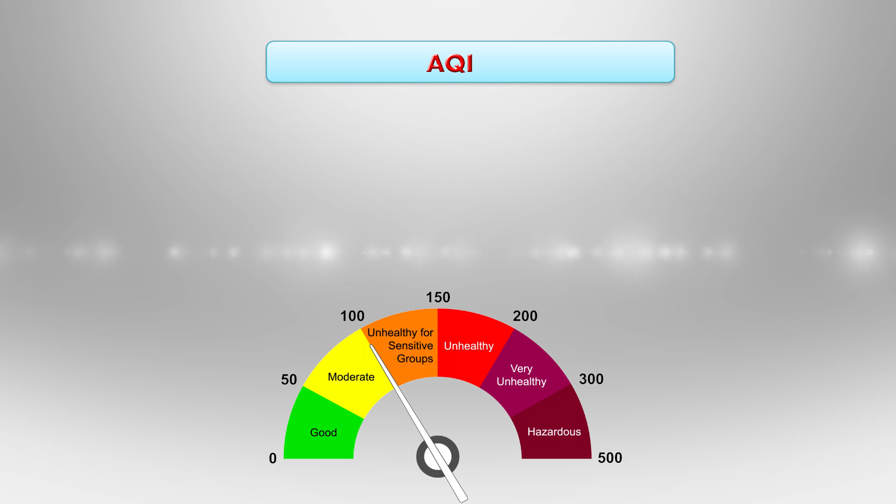Before understanding the treatment technologies of air pollution, we have to understand what air quality is. Are there any parameters to understand air quality? One such parameter is the air quality index. The Environmental Protection Agency maintains a system of rating the safety of the air in a given area, which is called the air quality index. Understanding the air quality index is crucial because it gives every one of us vital information about the conditions of the air in our location and how the air quality in our city can impact our health on a daily basis.

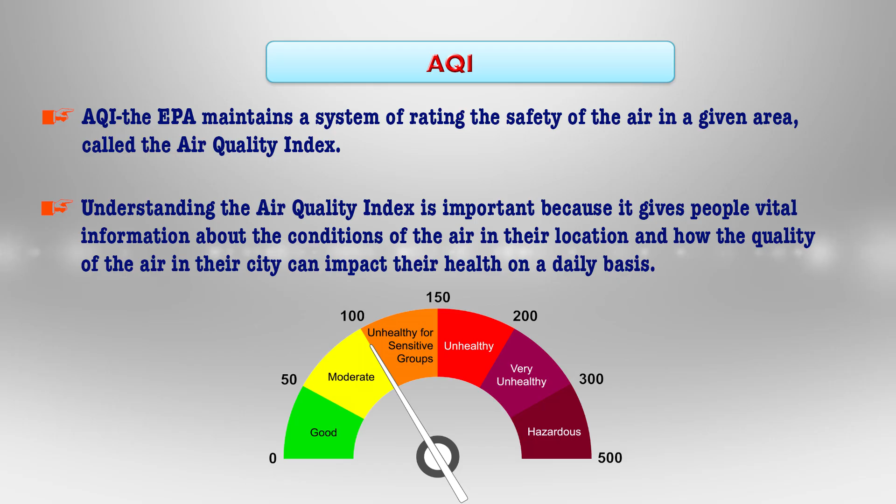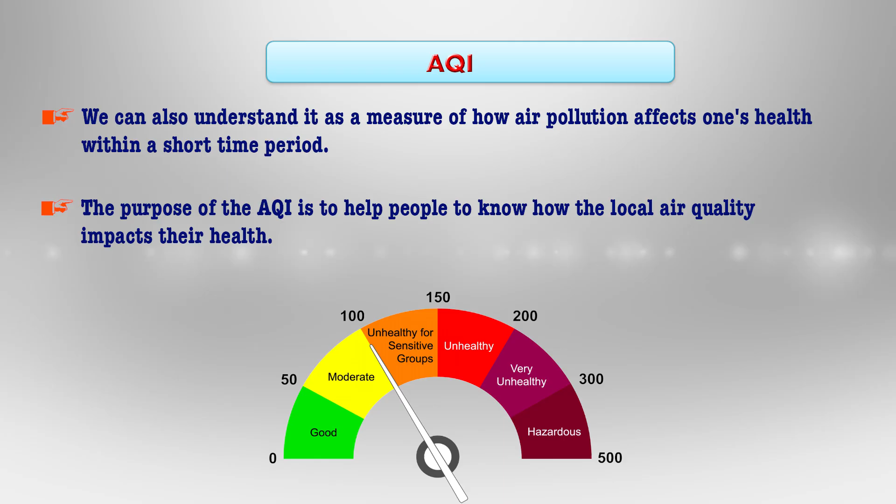It is a measure of how air pollution affects one's health within a short span of time. The purpose of the air quality index is mainly to help people know how the local air quality impacts health. AQI is needed to provide a metric for warning citizens, because they have to know the dangers of air pollution at various levels of intensity. Air pollution is one of the primary causes of health ailments and premature deaths across the globe. The World Health Organization estimates that ambient outdoor air pollution kills around 3 million people every year. Just see the sad state of affairs.

The most common air pollutants we see outdoors are the criteria air pollutants, as EPA has categorized them, which we have already discussed in previous sessions. These criteria air pollutants are ground level ozone, particulate matter 2.5, particulate matter 10, lead, carbon monoxide, nitrogen dioxide and sulfur dioxide. First we have seen ozone pollution, because that is also one of the criteria pollutants.

Ozone comes from the emission of volatile organic compounds that interact with sunlight and heat to form ground level ozone, which is an important chemical in photochemical smog. Ozone pollution can irritate the eyes, nose and throat, and it will remain for a longer duration in people's lungs.

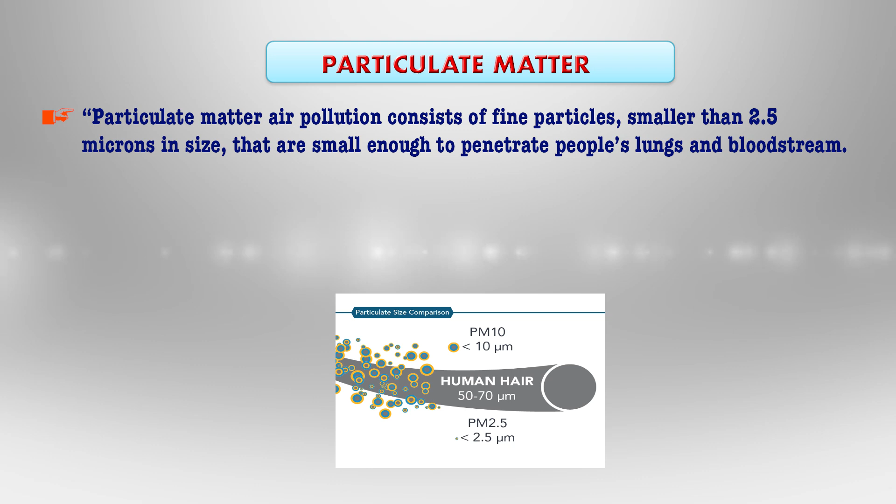Next to ozone, particulate matter air pollution mainly consists of fine particles smaller than 2.5 microns in size, which are small enough to penetrate into the lungs as well as the bloodstream. That also we have discussed. This particulate matter pollution can cause heart and lung disorders and increase a person's chance of developing lung cancer.

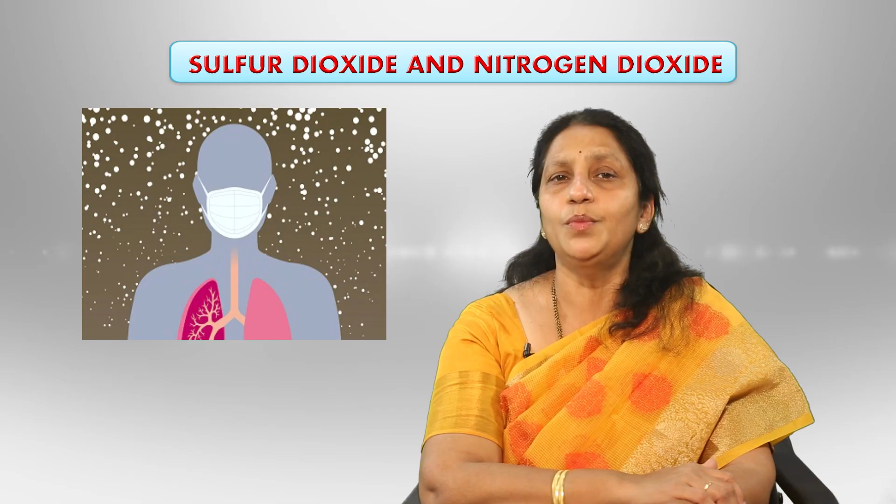So, both sulfur dioxide as well as nitrogen dioxide, which are emitted from industrial areas as well as automobiles, can definitely cause respiratory ailments like asthma. It is thought to be a contributor to asthma and is also related to emergency room visits. High levels of exposure can definitely reduce lung function permanently.

Next to particulate matter, the next one is carbon monoxide, which is released into the air primarily by the incomplete combustion of fossil fuels. It is colorless and odorless, so we are unable to identify and recognize the carbon monoxide pollutant. When inhaled in large amounts, it can easily lead first to confusion, then dizziness, and finally death.

The levels of atmospheric lead have decreased by around 98% since 1980, but lead as a pollutant can still be found in the atmosphere. Exposure to this lead contaminant can cause a variety of problems. Especially, it can impact kidney function, the entire nervous system and the immune system, and also cause developmental problems in children.

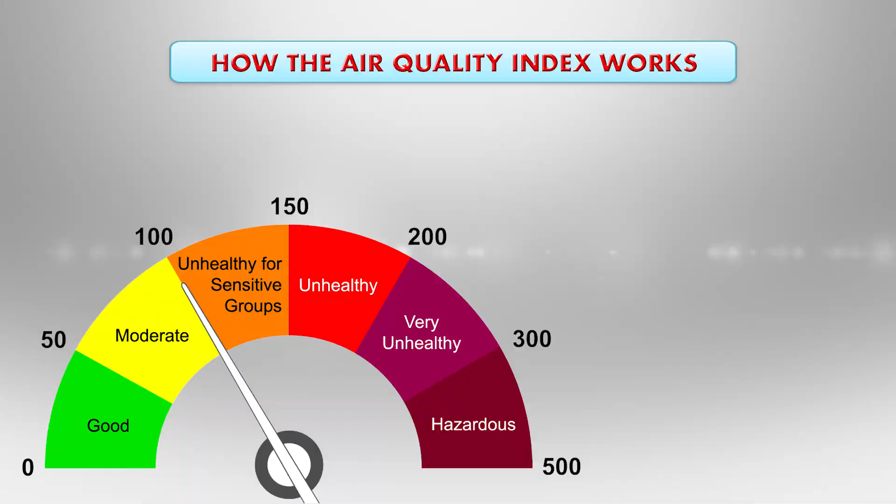So, due to these dangers of ambient air pollution, a system for warning citizens about abnormally high and dangerous levels of ambient air pollution is highly required. The air quality index is one such parameter to make us understand the levels of air pollution in the general environment. So here we have to understand how the air quality index works.

Depending upon the level of atmospheric air pollutants present in a specific area, the ranking goes from good air quality to hazardous air quality. Each ranking has a corresponding number value as well as a color code, so that we can easily identify and understand how polluted the surrounding air is.

The first ranking in the air quality index represents good air quality. It is represented by the color green and covers the values 0 to 50. That means if the AQI value is between 0 and 50, we can understand that the air quality is good. Air in the good category normally poses very little or no risk to the health of the general population.

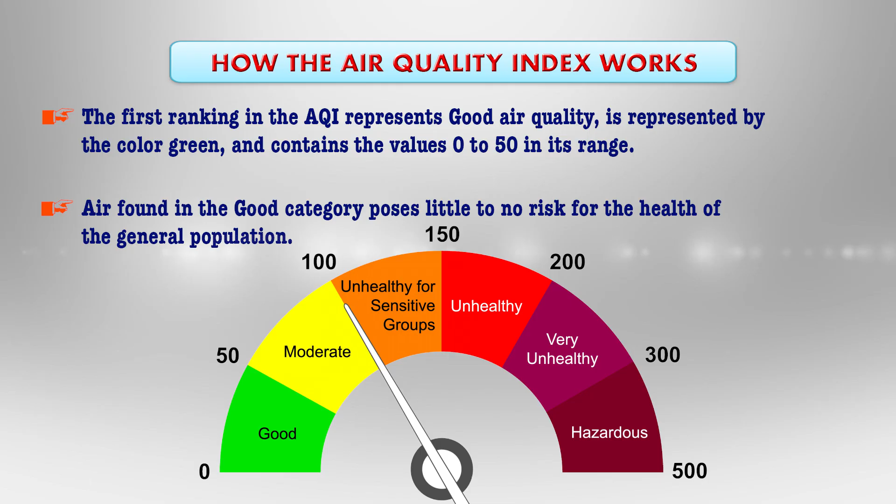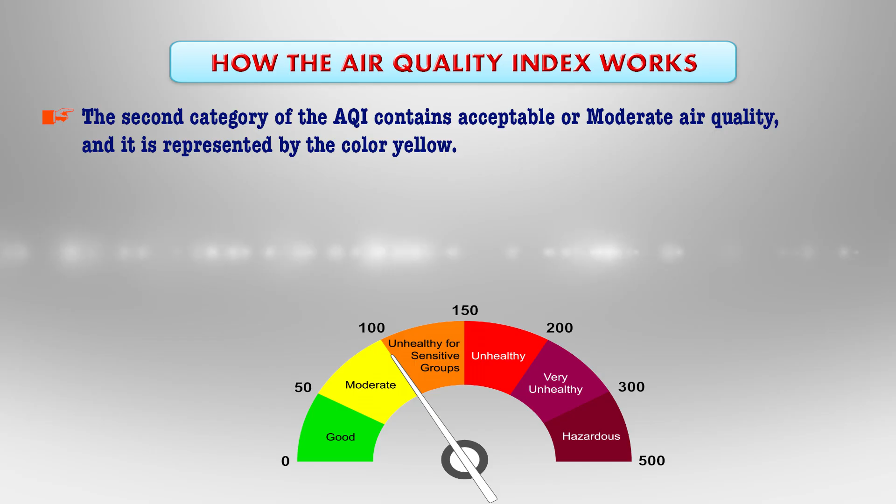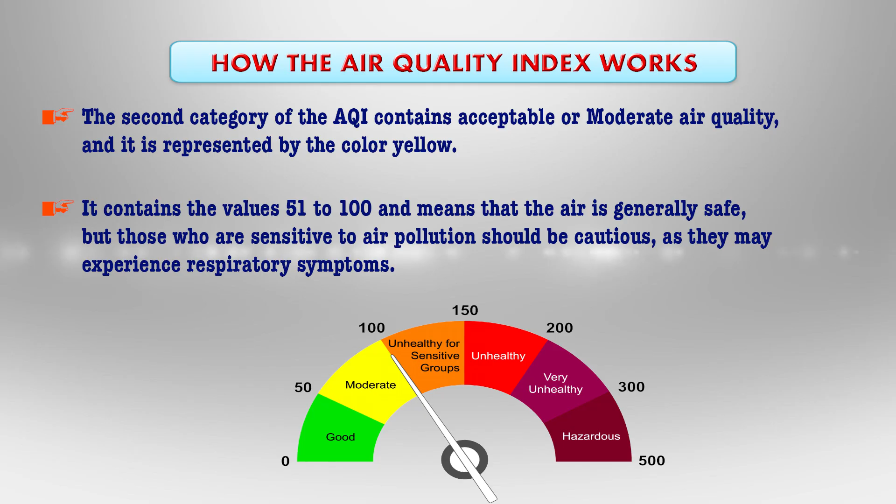The second category of the AQI is acceptable, or moderate, air quality, which is represented by the color yellow and contains the values from 51 to 100. That means the air is generally safe. We cannot say good, but it is safe. But those who are sensitive to air pollution have to take some precautions, as they may sometimes experience respiratory symptoms.

The third category of the AQI represents air that is unhealthy for sensitive groups. It is symbolized by the color orange, and the values are between 101 and 150. That means the general public is not likely to be negatively impacted by the air, but sensitive groups like older people and children are at risk from exposure to particles present in the air.

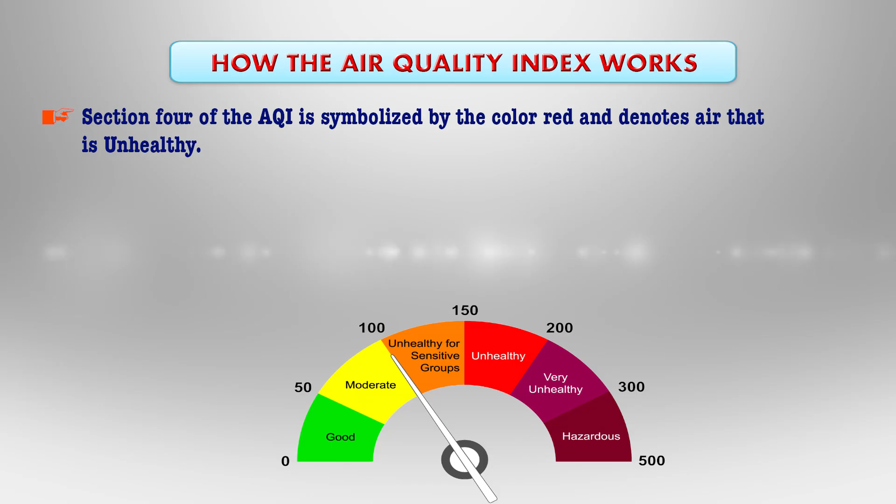The fourth stage of the air quality index is symbolized by the color red, meaning air that is unhealthy. It contains the values 151 to 200. At this level the air can start having adverse health impacts on the entire population, and people who are sensitive, and also children, can experience much more serious adverse health effects.

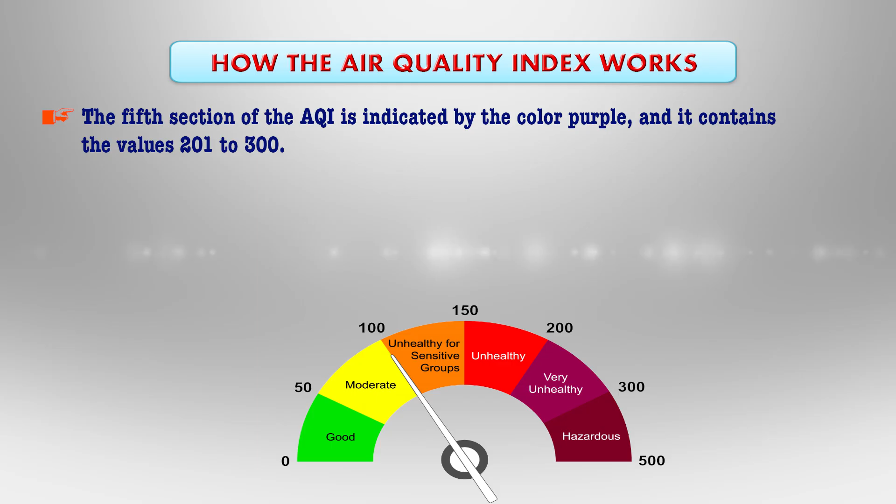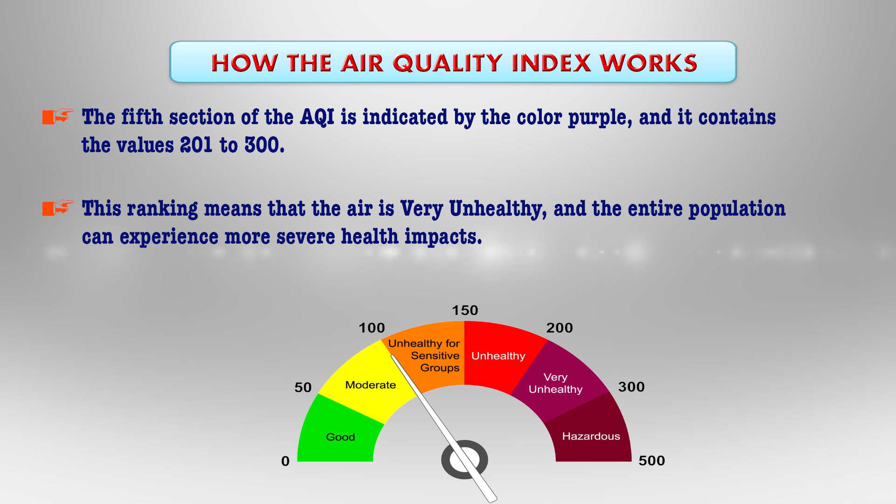The next category, number 5, is indicated by the color purple and contains the values 201 to 300. This ranking means that the air is very unhealthy and the entire population can experience more severe health impacts.

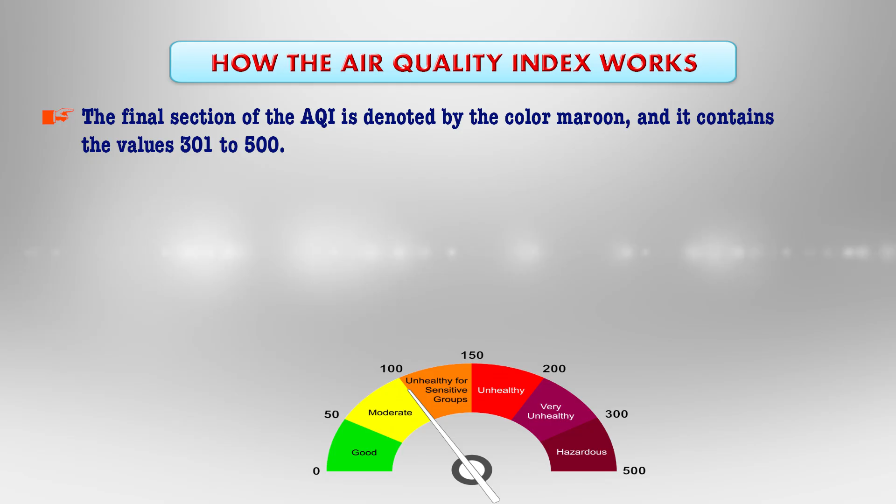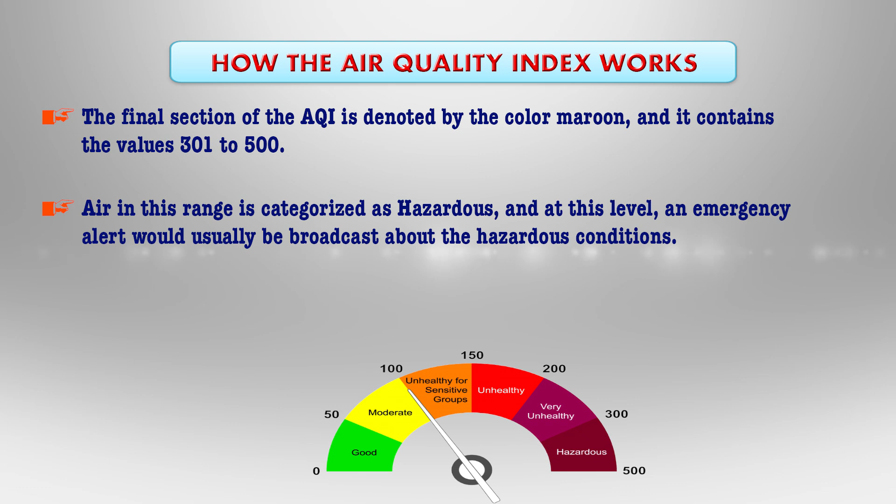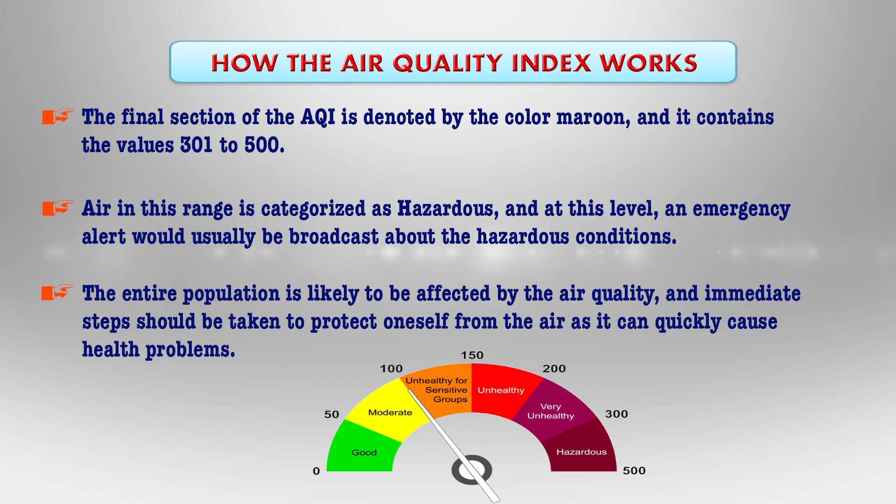The final category of the AQI is represented by the color maroon, and it contains the values 301 to 500, which is what we are experiencing nowadays. Air in this range is categorized as hazardous, and at this level an emergency alert would usually be broadcast about the hazardous conditions. The entire population is likely to be affected, and immediate steps should be taken to protect oneself from the air, as it can quickly cause health problems.

So at the very unhealthy and hazardous levels, we have to limit the time spent outdoors if possible, only going out when it is absolutely necessary. So stay away from the freeways as well as the major centers of traffic, and then go out when pollution levels are very, very low.

So we can also use industrial grade face masks to limit the amount of pollution we are breathing. We will also want to invest in quality air filters and air purifiers for our home, and also understanding the air quality index, which is critical for our health.

So who is most at risk from this air pollution? We have seen that people with lung diseases like asthma and chronic bronchitis, and also children, including teenagers. Active people of all ages who exercise or work intensively outdoors will definitely be affected. Some healthy people are also more sensitive to ozone type of pollution. So understanding the air quality index is important because it keeps us informed about how to protect our health.

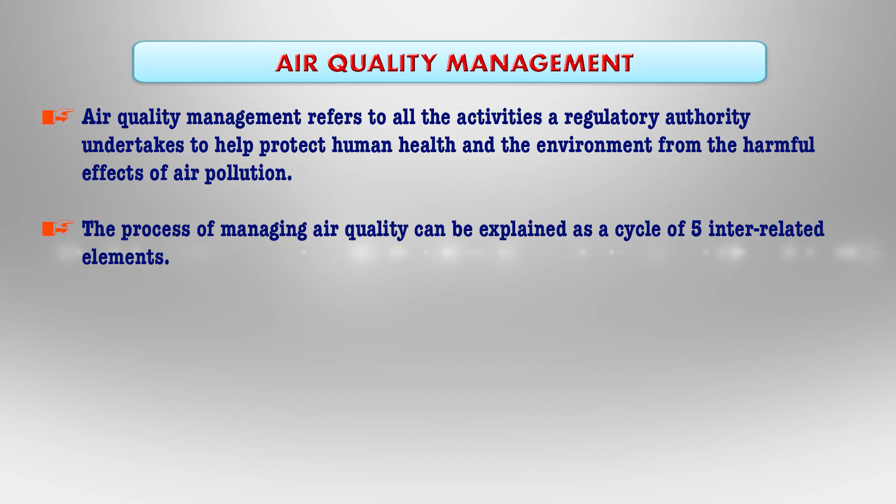So now we will look into air quality management. Air quality management means all the activities the regulatory authority undertakes to help protect human health and also the environment from the harmful effects of air pollution. The process of managing air quality can be understood as a cycle of 5 interrelated stages, or elements, as we can call them.

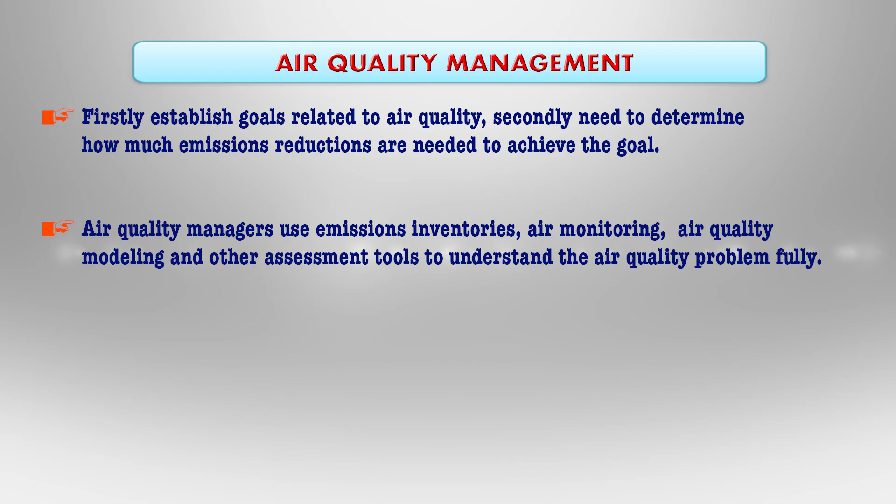Firstly, establish goals related to air quality, and secondly, determine how much emission reduction is needed to achieve the goal. Air quality managers normally use emission inventories, air monitoring, air quality modeling, and other assessment tools to understand the air quality problem fully.

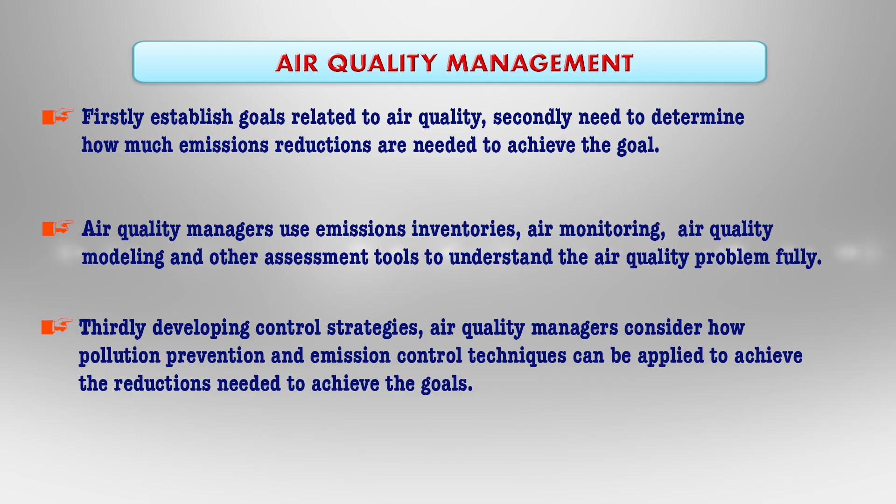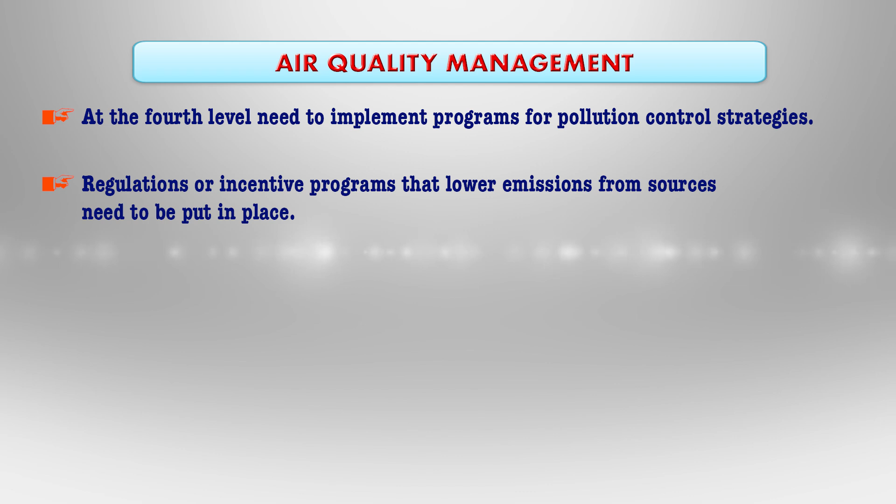Thirdly, developing control strategies: air quality managers consider how pollution prevention and emission control techniques can be applied to achieve the reductions needed to meet the goals. At the fourth level, we need to implement programs for pollution control strategies. Regulations or incentive programs which lower emissions from the sources need to be put in place. Regulated industries need to be trained and assisted in how to comply with these rules, and all these rules need to be enforced properly.

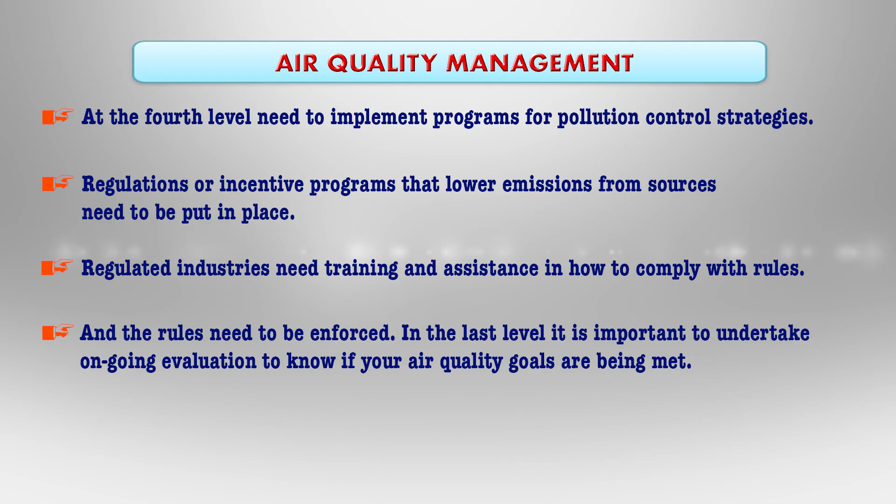In the last level, it is important to undertake ongoing evaluation to know if your air quality goals are being met or not. This cycle is a very dynamic process, with continuous review and assessment of goals as well as strategies based on their effectiveness.

All parts of this process are informed by scientific research, which provides air quality managers with essential understanding of how pollutants are emitted, and once emitted into the atmosphere, with so many factors such as wind speed as well as pressure, how they are transported and transformed in the air, and their effects on human health and also the environment. So with all these, now we will discuss some of the important controlling methods which you have studied in your topics.

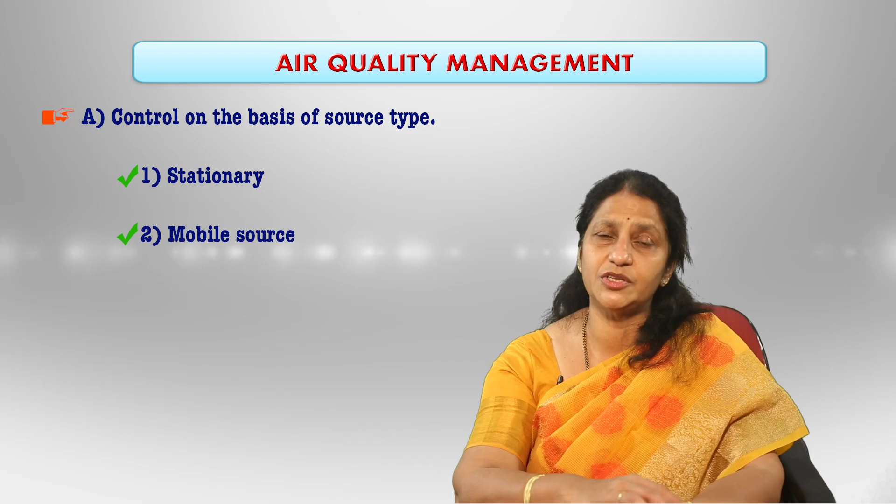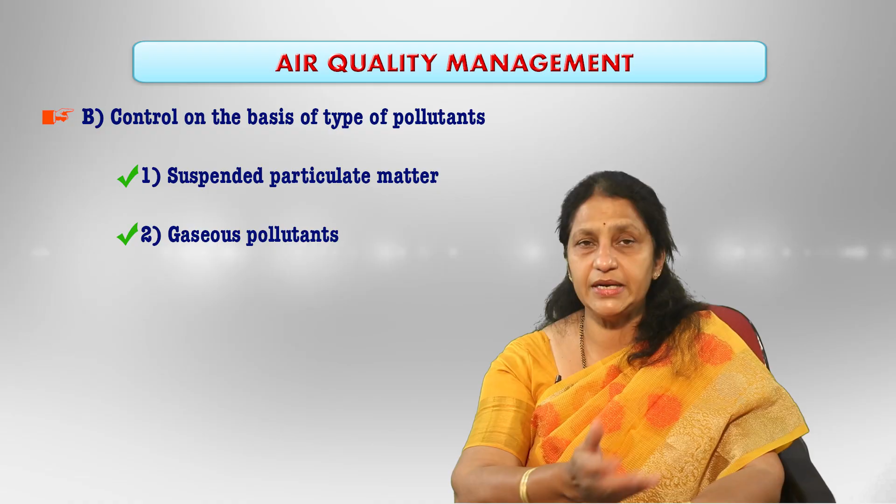The controlling methods for air pollutants are basically classified into two categories: control on the basis of the source type, that is stationary or mobile, and control on the basis of the type of pollutant, whether it is suspended particulate matter or gaseous pollutants. Mobile sources are moving sources like aeroplanes, trains and automobiles, whereas stationary sources are fixed sources, that is industrial sources, such as a power plant, a factory and other facilities like that.

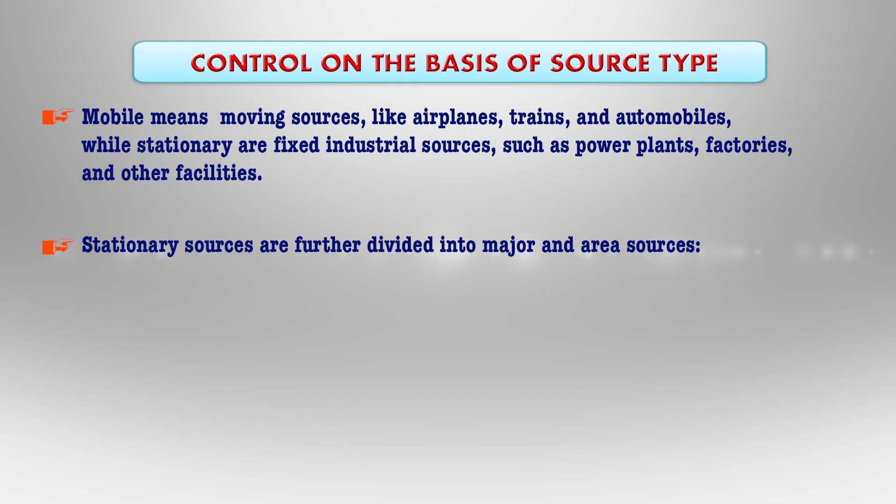Stationary sources are again divided into major and area sources. Major sources emit either 10 or more tons of a single air pollutant or 25 or more tons of a combination of air pollutants, so they are divided on the basis of the pollutant load. The second is area sources, which emit less than 10 tons of a single pollutant or less than 25 tons of a combination of pollutants.

So in high enough concentrations, the pollutants which are produced either by the mobile or from the stationary sources could cause adverse effects to the atmosphere as well as the surrounding environment, and especially human life, by increasing the average global temperature, decreasing the atmospheric visibility, which obviously we are experiencing, diminishing the air quality and affecting human health.

If you look into the industrial setup, there the air pollution control equipment as well as the systems are used to regulate the emissions and to eliminate potentially hazardous substances, for example particulate matter, volatile organic compounds and gaseous substances produced by the manufacturing as well as the processing systems. These control equipment prevent the release of chemicals, vapors and dust by filtering and purifying the air within the working environment.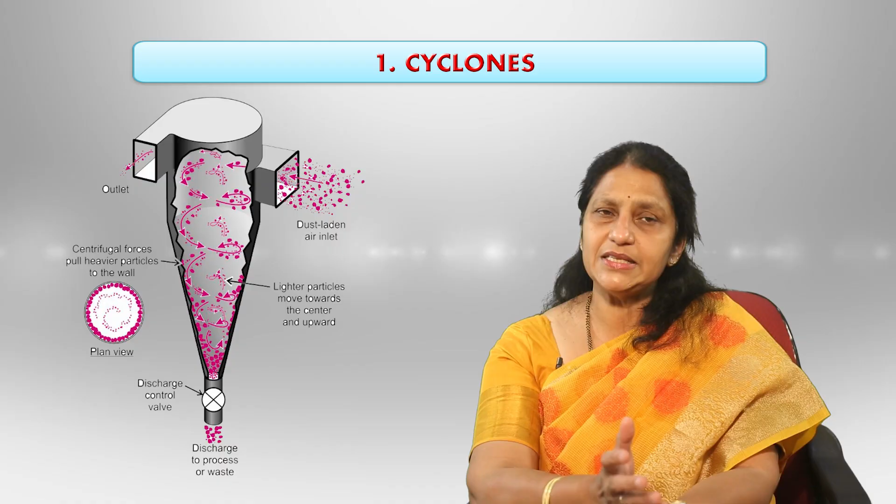In that cylindrical chamber there is a swirling motion that forces large particulate matter against the chamber wall, which slows their inertia, that is speed, causing them to drop into the collection hopper below, so that further processing and disposal become easy. Once it is done, the cleaned gas streams are released out of the cyclone system.

These cyclones are typically employed for filtration of particulate matter above or equal to 50 millimicrons in diameter. Some models are capable of greater than 90% efficiency for particulate matter greater than or equal to 10 to 20 microns. That means the efficiency depends on the size of the particulate matter.

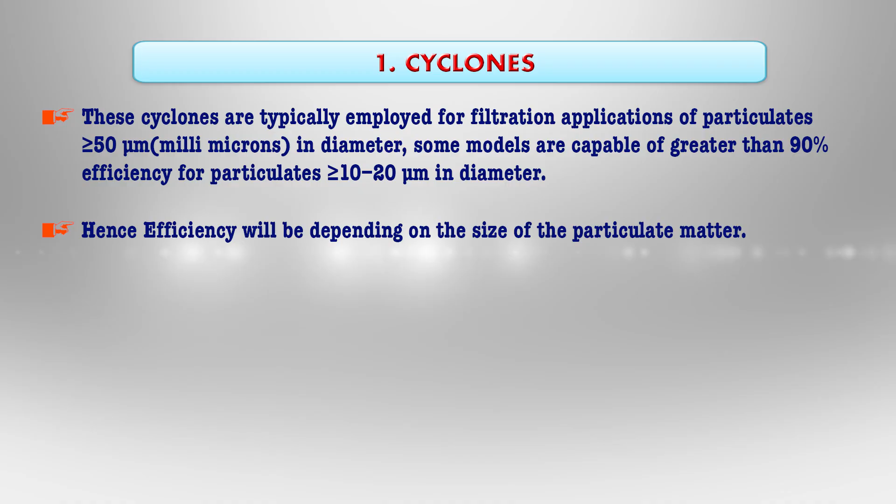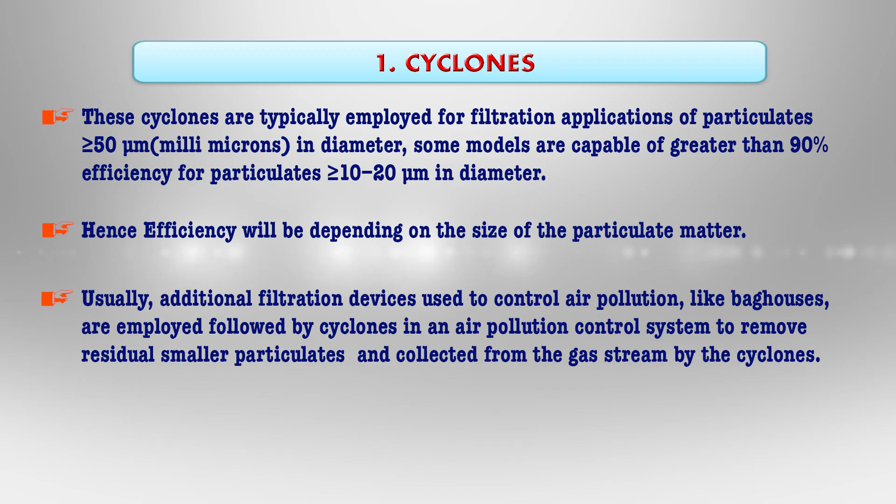Usually additional filtration devices are used to control air pollution, like baghouses, which follow the cyclones in an air pollution control system to remove the residual smaller particles not collected from the gas stream by the cyclones.

Another technology is wet scrubbers. These are also known as wet absorption scrubbers or wet collectors. They use liquid solutions, typically water, to collect and remove water-soluble gases as well as particulate pollutants from industrial emissions.

This wet scrubbing process either passes a gas stream through a liquid solution, or injects a liquid solution into a gas stream. As the gas stream comes into contact with the liquid, the solution absorbs the pollutant, removing it from the stream.

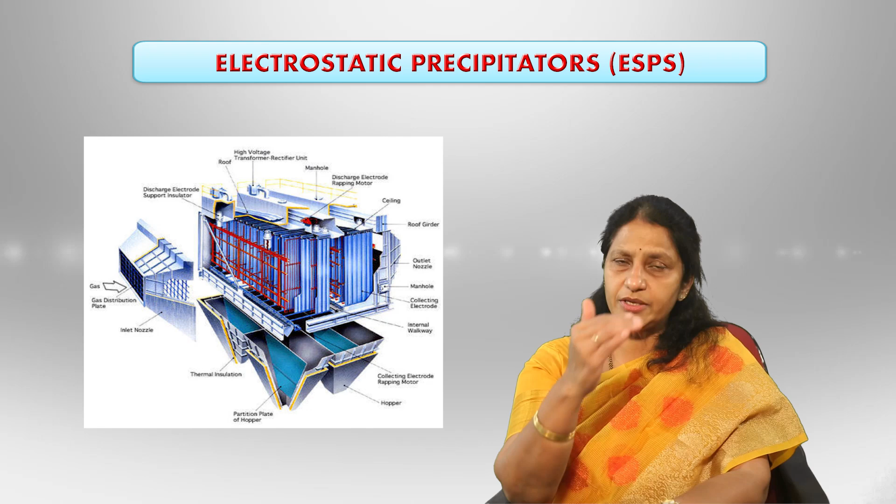So next to this wet collection chamber, another important technology is also used, that is the electrostatic precipitators, ESPs. Just like air filters as well as the cyclones, these electrostatic precipitators are also one of the important air pollution controlling devices. They are used to collect and remove the particulate matter like dust from the industrial emissions and also the exhaust.

So these ESPs especially use transformers to create a high static electrical potential difference between the charging electrodes and the collecting plates. So once the gas stream passes between these two components, an electric charge is introduced to the particulate matter that attracts the particulate matter to the collecting plates.

Similarly to the air filters, particulate matter accumulation is periodically removed from the collecting plates and deposited in a collection hopper which is present below that instrument, either through mechanically dislodging the particulate matter or by introducing water to clean off the particulate matter. So this method is known as the ESPs. They have multiple collection plates and their efficiencies normally exceed 99%.

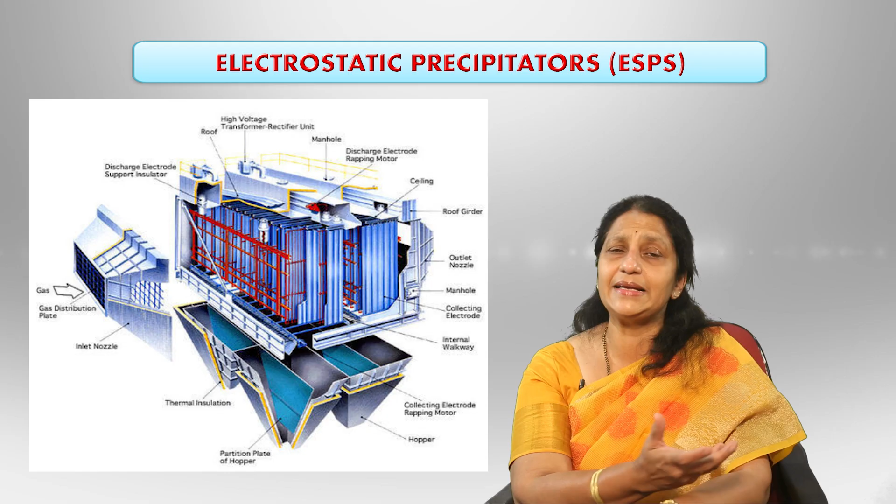So as air passes through a bag house, the particulate matter collects and accumulates on the filter's surface. So the gradual accumulation increases the efficiency of the filter, allowing smaller particles to collect and also causing a buildup of pressure across the filter fabric. So some bag houses are also capable of attaining almost 99.9% efficiency even for small particulate matter.

So these types of filters are suitable for filtering out air pollutants in a variety of industrial processes like power plants, metal processing centers and foundries, and also multi-stage cleaning systems as well. So the particulate accumulation and the resulting pressure differential prompt the need for periodic cleaning.

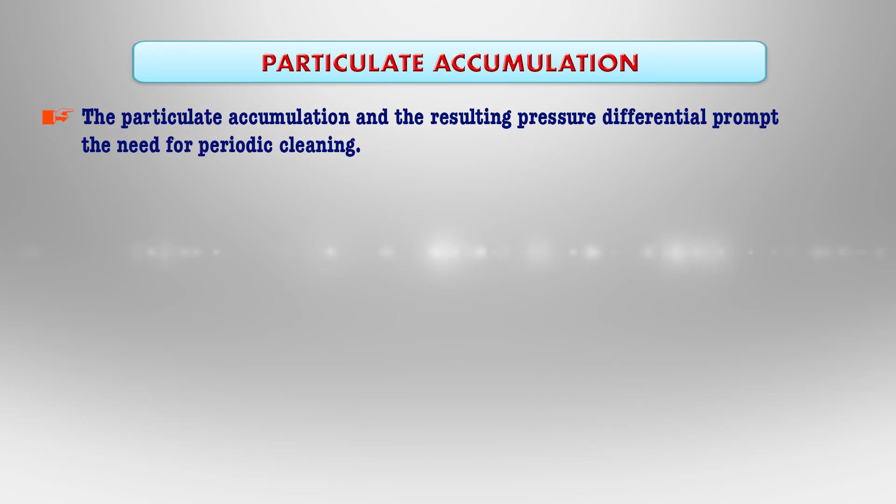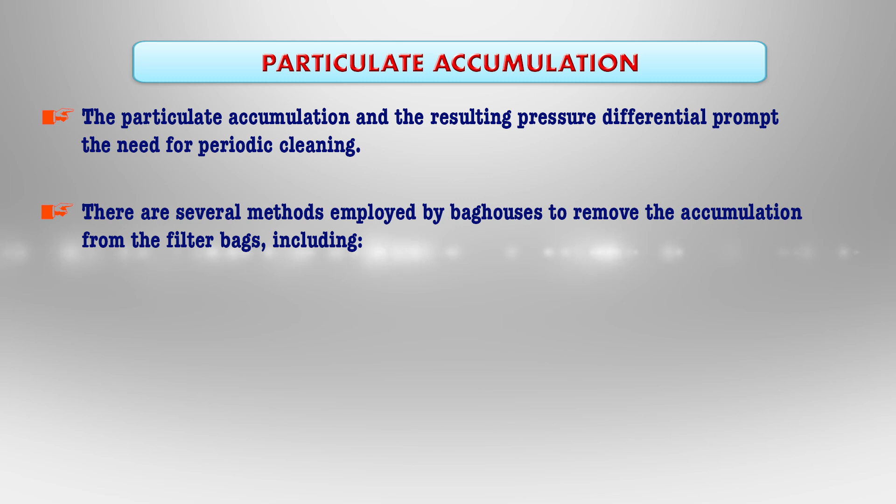So several methods are employed by the bag houses for removing the accumulated particles from the filter bags, like shaking the filter bags and also introducing an air flow into the filter bags in the opposite direction, so that the filtration process will be more efficient. And also pulsing compressed air into the filter bags in the opposite direction to the filtration process.

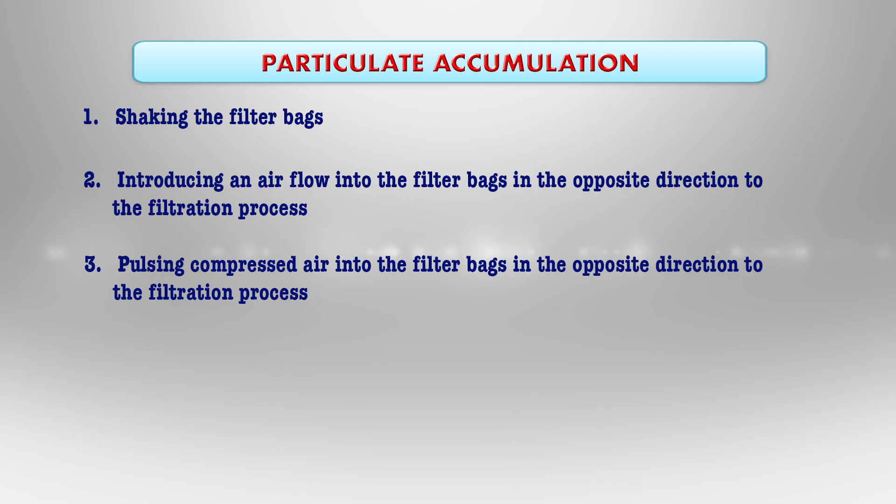And many pollutants, both natural as well as synthetic, are gaseous in nature and require specific technology to effectively remove the pollutant from the exhaust or the process gas stream. So some gaseous industrial pollutants like acid gases, that is hydrochloric acid, sulfuric acid and hydrogen sulfide, inorganic gases like sulfur oxides, nitrogen oxides, ammonia, and also organic gases, ethanol, and many volatile organic compounds are hazardous air pollutants.

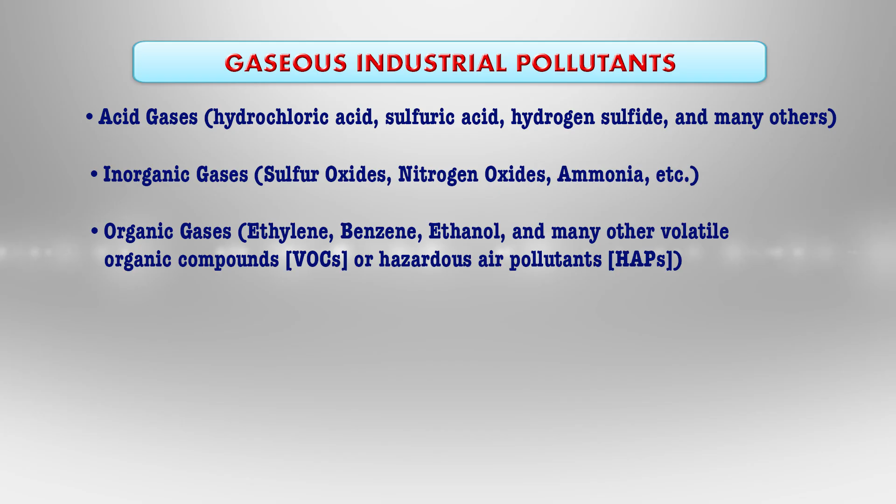So one of the procedures for these gaseous pollutants is absorption. We know that absorption is a physical or sometimes a chemical process of removing a pollutant from a gas phase media by dissolving the pollutant into a solvent media. Commonly the solvent media is a liquid phase, but it can be a dry bulk solid in certain systems.

So the material that absorbs is normally called a solvent, and the gas that is to be absorbed is known as the solute. The most common form of absorption is wet scrubbing. Wet scrubber is a generic name we normally give to a control device that uses the process of absorption to separate the pollutant from a gas stream.

And the next process is adsorption. Adsorption is the mass transfer process in which a porous solid comes in contact with a liquid or gaseous stream to selectively remove pollutants or contaminants by depositing, that is adsorbing, them on that solid. The contaminants being removed are normally called the adsorbate, and the solid doing this process is known as the adsorbent.

So the adsorption process can be both a physical as well as a chemical process. In physical adsorption, we will see that the adsorbate molecule, that is the contaminant, adheres to the adsorbent material by a physical bonding force which is known as the van der Waals forces.

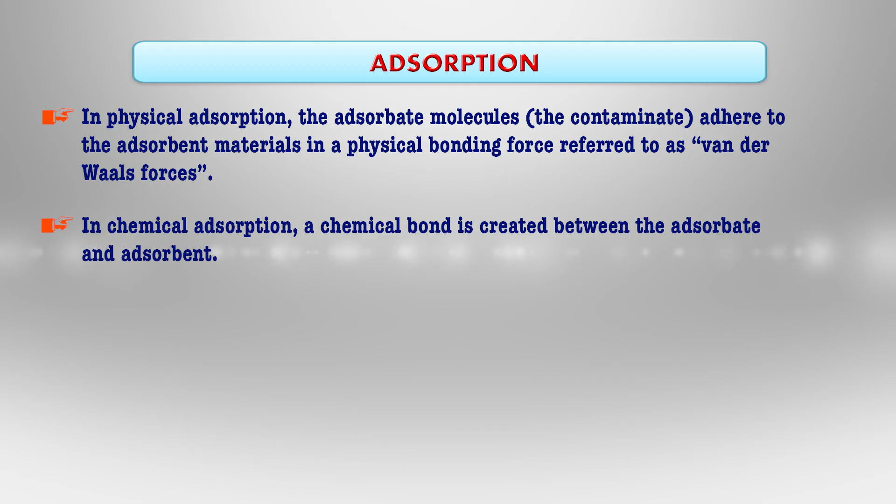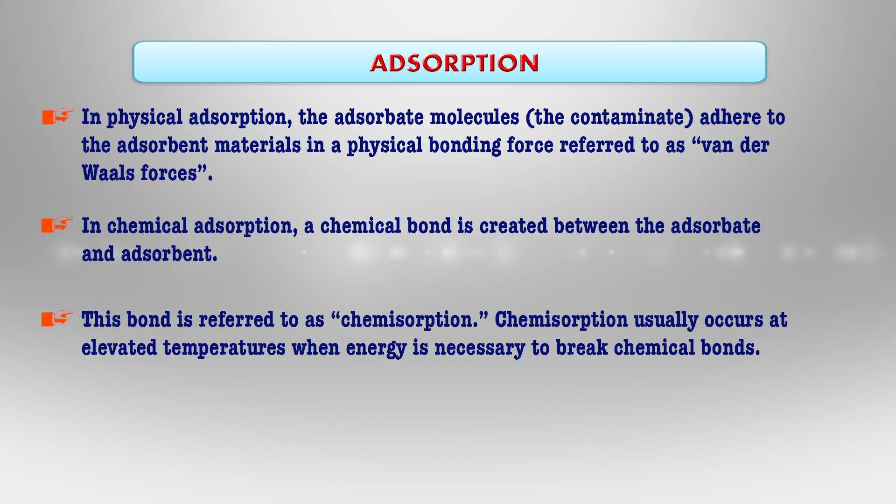If you look at chemical adsorption, a chemical bond is created between the adsorbate and the adsorbent. This is known as chemisorption. Chemisorption normally occurs at elevated temperatures, when energy is required to break chemical bonds. And chemisorption is, of course, essentially the same process which is observed in catalytic oxidation.

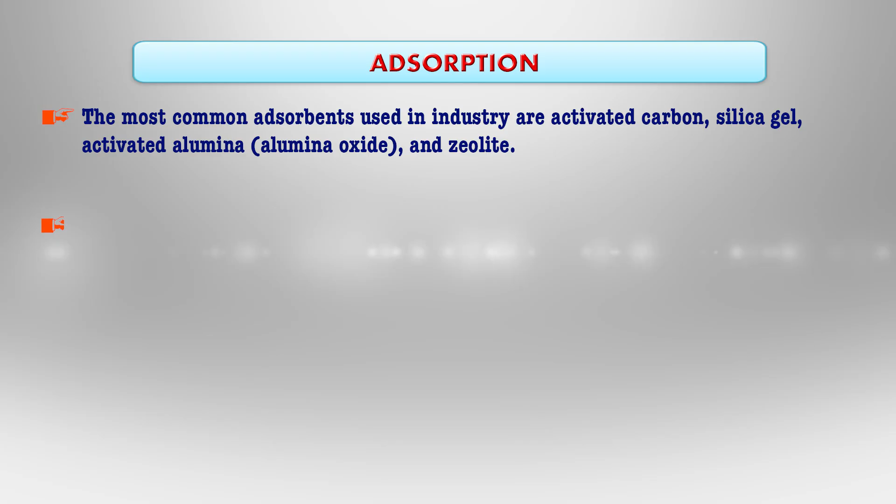The most common adsorbents used in industry are activated carbon, because of its high surface area, silica gel, activated alumina, that is aluminium oxide, and also zeolite. Most important is adsorbent selection: we select on the basis of pore size and distribution, particle size, chemical nature, surface area and surface polarity. Polarity especially is the most important characteristic for selection, because it determines the type of adsorbate for which any particular adsorbent will have the best performance.

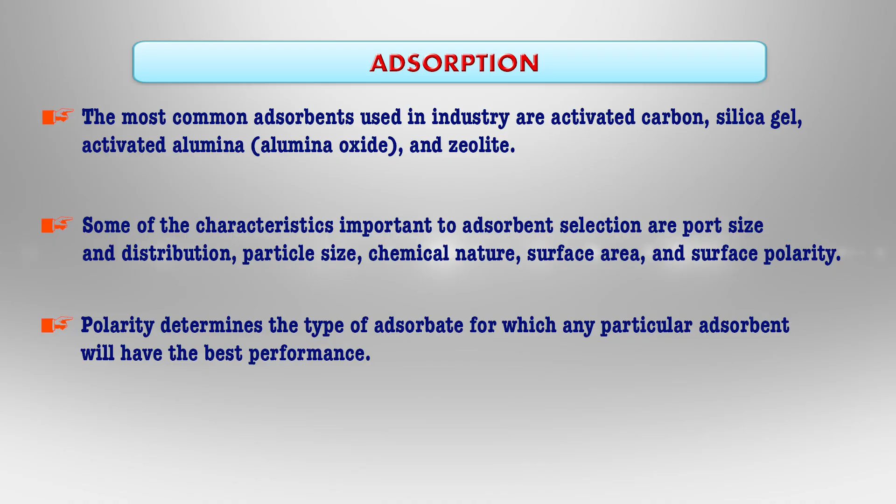Activated carbon is the most common non-polar adsorbent, and polar adsorbents have a great attraction for moisture. Most industrial exhaust streams contain moisture, so the use of polar adsorbents is significantly limited for air pollution control systems.

The next one is condensation. It is a process used heavily throughout industry to convert a gas or vapor into liquid form. Any gas can be reduced to a liquid by sufficiently lowering the temperature or increasing the pressure, and then this condensation process is employed. Some examples are the distillation of various hydrocarbons in refining operations and the drying of air.

Condensation can be used to remove a pollutant from a gaseous stream if the dew point of the pollutant is higher than that of the carrier gas. If this is true, the total gas stream can be reduced in temperature to below the pollutant's dew point, which will then separate the pollutant from the remaining gas stream as a liquid. These are the things we have to understand to decide whether to use the condensation technique or not.

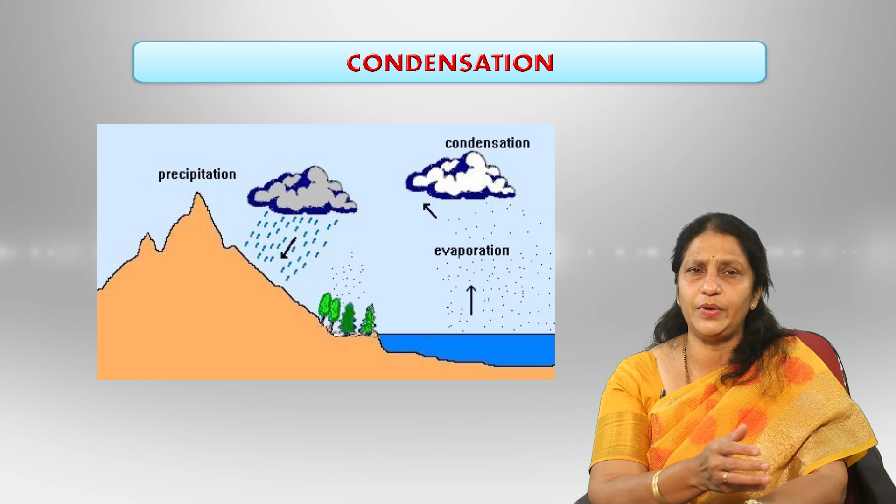Condensation occurs because the pollutant molecules are slowed and crowded so close together that the attractive forces between the molecules cause them to condense into a liquid. This phenomenon is known as van der Waals forces.

Next, the incineration process. The incineration of volatile organic compounds and hydrocarbon fumes is usually done in a special type of incinerator known as an afterburner. To achieve complete combustion, the afterburner must provide the proper amount of turbulence and burning time, and also maintain sufficiently high temperatures. Sufficient turbulence or mixing is a key factor in combustion because it reduces the required burning time and temperature.

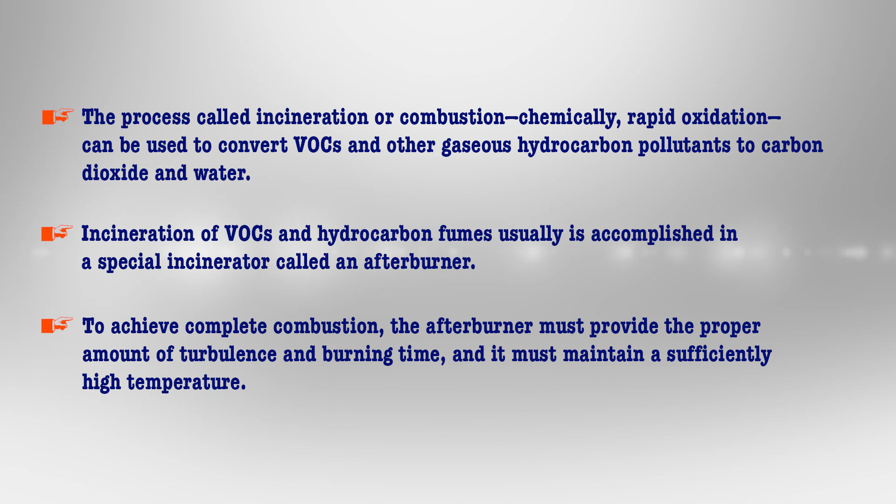A process known as direct flame incineration can be used when the waste gas itself is a combustible mixture and does not require the addition of air or fuel. With all these technologies we have studied, we have to understand that the choice depends upon the size and the nature of the gaseous pollutant.

To conclude, so far we have discussed various air pollution treatment technologies, like combustion, which is applied when the pollutants are organic gases or vapors exposed to flame or catalytic combustion, where they are converted to less harmful products such as carbon dioxide and water. The second technology we have seen is absorption. In this technique, the polluted air containing the gaseous pollutant is passed through a scrubber that carries a suitable liquid absorbent, which absorbs the harmful gaseous pollutants.

We have also seen some adsorption procedures, where gaseous pollutants are adsorbed at the surface of a porous solid and clean air passes through. For controlling particulate emissions, we have also studied other techniques, such as fabric filters, wet scrubbers, electrostatic precipitators, and technology based on gravity, in which the particulates settle down by the action of gravitational force.